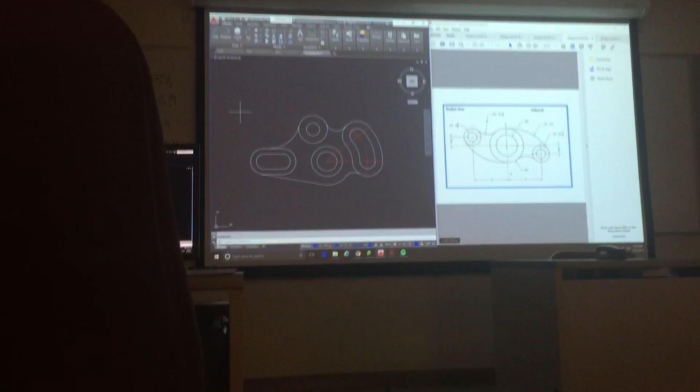Swear to God, student in there again. What? The student in the... Oh yeah? Cabinet. Sorry about that guy.

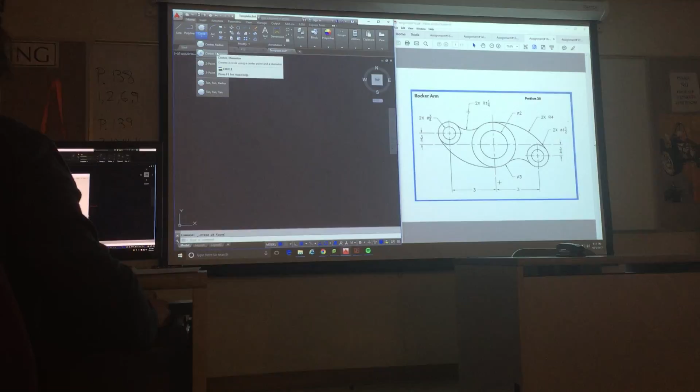So this one, like I said, really isn't that bad. I'd say you probably have enough knowledge to do all of these circles. Let's start with a general understanding that these are diameter for all of them, and you're going to start with these two center ones, which are going to be 2 and 3 respectively.

So that's going to be my 2 circles. They tell you at the bottom that the one to the left is over 3 and up 3/4, and the right one is over 3 and down 3/4. So I'm simply going to use my lines here, go over 3 inches, and go down.

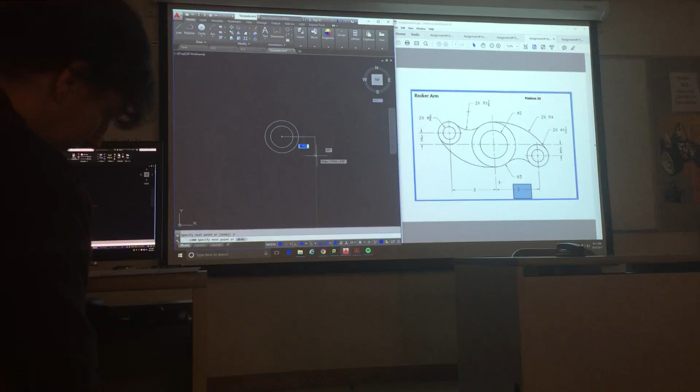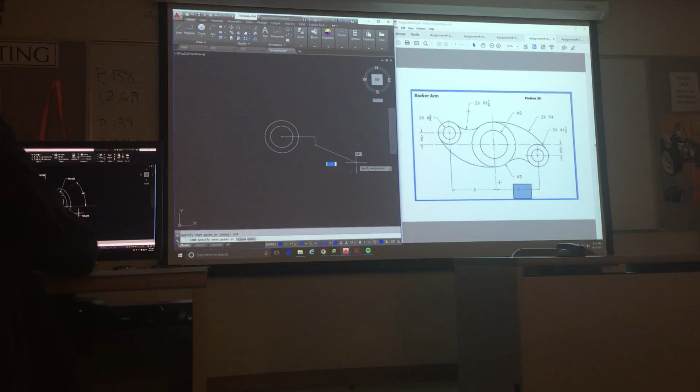This is kind of the transition. I specifically picked this one for fractional inputs, because we've been doing decimal inputs, right? Fractional inputs go like this: you hit 3, then the divide sign or slash, so 3/4, and enter. You can actually type in fractions, which is kind of cool. You don't even have to do the decimal conversion, which some of you will still do because you're used to decimal points and it's faster. That's fine too, but you should know you can enter these fractional inputs.

So again, I'm going to go from the center to the left. They tell me that's also 3, and I'm going to go up 3/4. So there I have my 2 layouts.

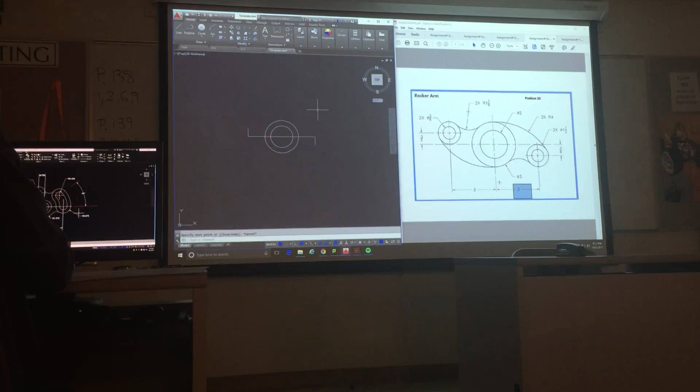From here, I'm going to do these circle sets, and they kind of break these up. This kind of sucks a little bit. There's one on this side, there's a 3/4 for the inside, and there's 1.5 for the outside.

So again, they're all diameter, so I'm going to get a diameter circle, and you guys already know 3/4. And the outside one for this—I want to make sure you see this—I'm going to do as a mixed number. Okay, so that changes a little bit. I know this is 1.5 diameter, so instantly I could do 1.5, that's the easy way. But you should also know how to do a mixed number.

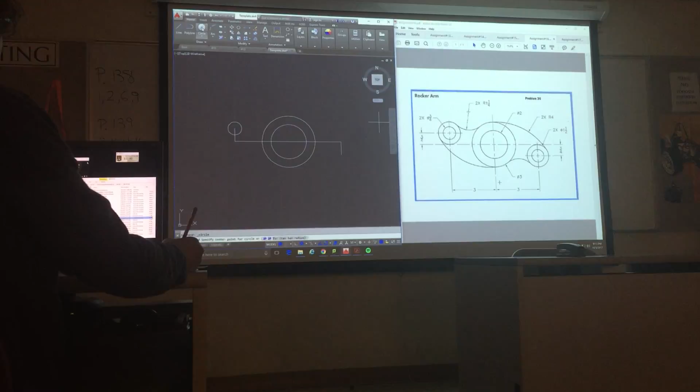So I'm going to go diameter, start here, and enter 1, dash like the minus sign, 1, slash like the divide sign, 2. You can see on the dynamic input it's going to be 1 minus 1 divide 2, so 1 and 1/2, and that's going to give me that.

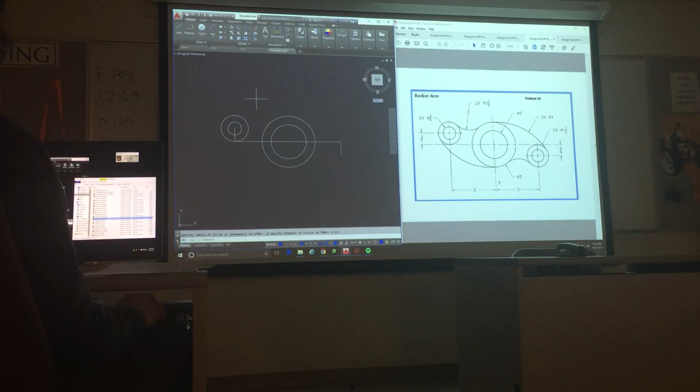So again, could you enter it? Yep, you can, but I'll tell you some of these will be like 1 9/16, and you're going to have to quickly do that decimal conversion, which some of you will and some of you won't be able to do. But for those who won't, you don't really have to—you can just put that in as a mixed number.

So for the last one here, I'm going to copy these guys. Again, you could totally recreate them if you want, or you can copy them—it's up to you. And I'm going to get rid of these layout lines, I don't need any of them. So I'll click all those guys, get rid of them, and hit delete.

So that's the part I think, other than the fraction which is a bit of a curveball, that's pretty simple—you're measuring over with lines, down with lines, and up with lines. That was pretty simple. The part that's more complex is the tangent-tangent radius.

For tangent-tangent radius, we've used this thing and it's never really mattered exactly where you click. When you come to these guys, it does matter where you click. And why it matters is, if you see this right here, it's concave—it's curving in. I need to make sure I click on the inside of this circle, so I'm going to click in here, and I'm going to click in here.

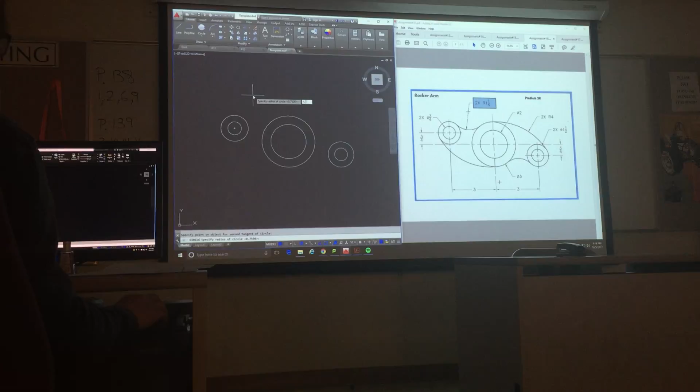Then I'm going to enter 1 minus 1 divide 4, so 1 1/4—that tells me up here it's 1 1/4. So you could do 1.25, or you could enter that as 1 1/4. And it's going to give me that nice curve. Of course, you could take the time and trim it now, or trim it later—doesn't really matter.

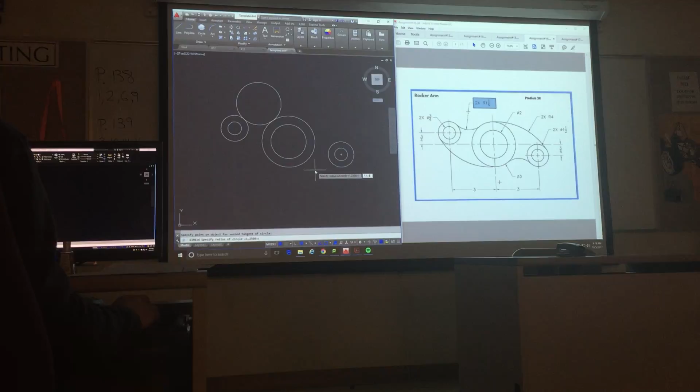I'm going to do the same thing for the bottom one, because it tells me there are 2. Again, I'm going to click nice and far inside, and do the 1 1/4. So there I get these 2. And I'm going to trim that so I just get the curves. So it should look something like that.

So again, let me run that back for you. I'm going to get tangent, tangent, radius.